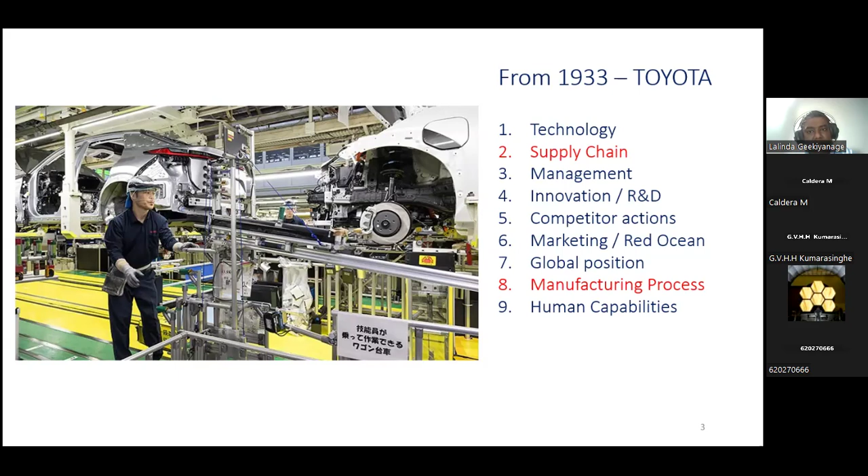The other thing is, when it comes to manufacturing process, you may have heard there are 8 wastages. Normally, in every organization, whether service industry, manufacturing, or production industry, we have to identify these 8 wastages. Initially it was 7, but now there's another one, and we practice 8 wastages in industry.

If you want to succeed in an industry, you have to eliminate some extended amount of this wastage. Otherwise, our production cost goes up, and our product cost goes up, and finally we will be eliminated from the industry. When you think about it broadly, you'll understand why Nokia failed in the manufacturing industry.

First one is transportation, because if you have over transportation, it will involve a lot of cost. The other one is inventory, because inventory means you are keeping your end product, or keeping your WIPs, work in progress, which can also be considered as inventories. Inventories means money that you block inside the factory. It doesn't have value, you can't sell it, but you always invest the money and block it inside the factory. Then you don't get any outcomes. Then your bank interest goes up, and all your financial stuff gets stuck.

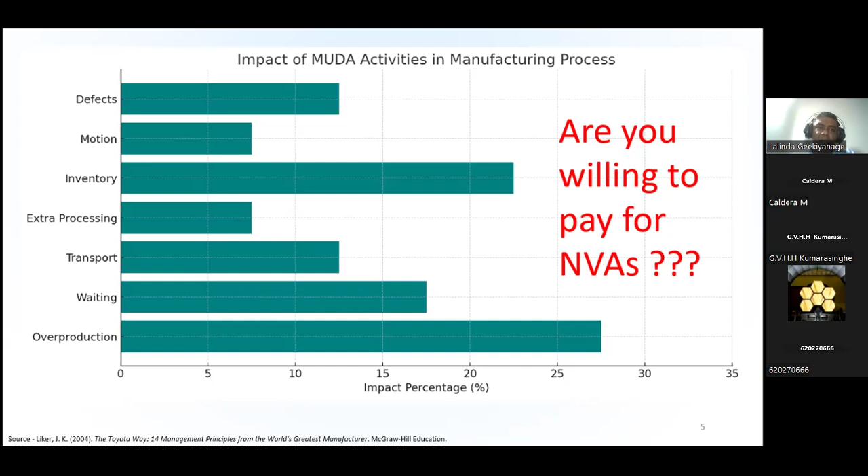In the next slide, I'll tell you how new technology is involved in minimizing these wastages in the industry. We have a small video, a 2 or 3 minute video - we'll listen to this. If you have anything, just let me know.

Excuse me, sir - I think we can't hear you. Sorry, we can't hear the video sound. There was an issue then, seems we can't hear. No, basically the explanation is coming, I don't know how it is. Hello? Yes, hello, we can hear you. Okay, sorry doctor, I think the voice is not linked with that. Yeah, that's fine, that's fine.

Okay, then what I try to show you in this video is basically the lean concept, because the lean concept...

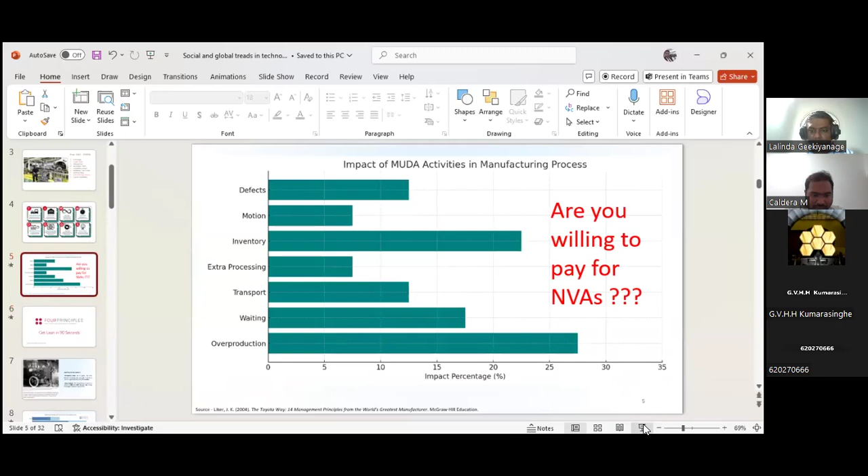Sorry for this one, because I thought the sound was coming through. Anyway, we were stopped at this point.

As I informed you, there are eight wastages in the industry. As a solution, Japanese people brought down this lean concept. There was a concept called Lean and Lean Six Sigma. Basically, lean is about identifying this wastage and giving some solution to eliminate those things. That was a kind of traditional approach.

Normally you see there are so many courses: Lean Six Sigma black belt, green belt, yellow belt, white belt, like that. Whatever it is, this lean concept came because of this wastage, because purely the lean concept came to eliminate wastage by understanding the process, understanding the wastage, and quantifying this wastage through information and data.

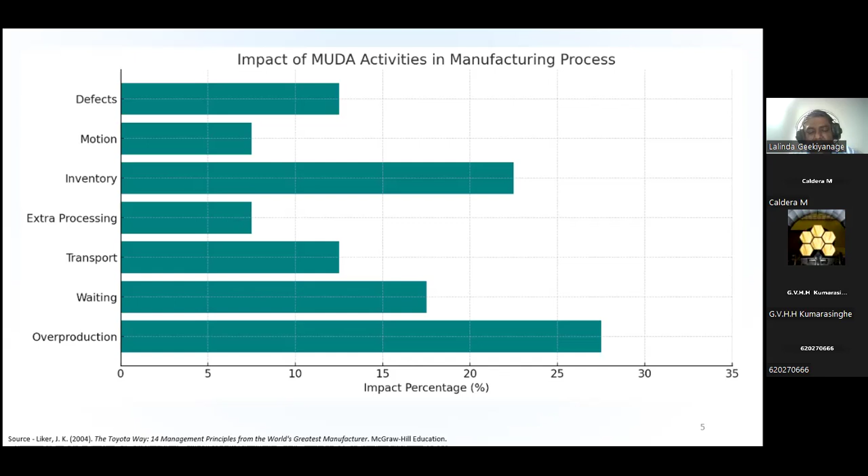So basically, even my organization also practices this lean concept - they focus on one particular wastage and don't invest too much money, because with the lean concept we are not investing too much money, but we try to eliminate those defects or wastages by changing the process slowly, not overnight. Some processes are not changed overnight, but time to time they understand, investigate, and change people's mindset - then only do the changes.

Okay, I think you may have heard about this story as well, because I'm linking this with another video, but it's not playing now, so no way, we don't want to waste time. I'll directly come to here.

I think when discussing this wastage, we may come across that outcome, like normally when it comes to every production industry... sorry, okay, there also one student is sharing how to do it. But anyway, thank you very much for this feedback. Anyway, we'll go through this way.

When it comes to every manufacturing organization, the first question asked by the top management is, what is your production rate? Normally we call it takt time, meaning how much product is coming out in 1 minute or 1 second.

The Ford T model is the world-recognized model of manufacturing, and they took 93 minutes to produce one car in a day. That means every 93 minutes a vehicle is coming from the factory. Their production outcome was 1,000 to 1,500 cars per day. I'm discussing 100 years back - just imagine, 100 years back, manufacturing one car took 93 minutes. But the only drawback was, as Henry Ford famously said, whatsoever I can provide is only the black car.

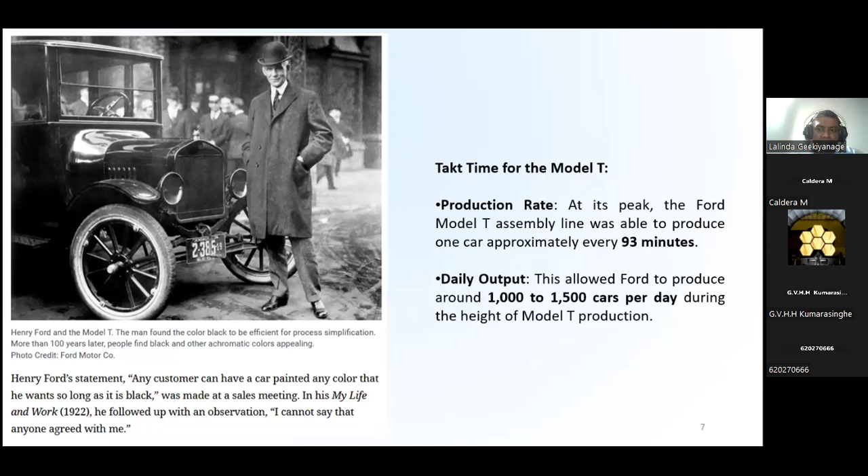Okay, now think about today's context. This is the takt time of today's context - meaning within a given time period, how many vehicles come out of the factory. Just see, Toyota took a maximum of 90 seconds for manufacturing one vehicle.

Volkswagen, 120 seconds. Ford, 120 seconds. GM, 150. Honda, 120. BMW, 180. Tesla, 90 seconds. I'm talking about today's context - only 90 seconds. Still, Toyota is at the top level because at minimum, within 60 seconds, they were sending out a vehicle. Just imagine how quick their production process is.

This is the development in the last 100 years. This is wastage elimination in industries. This is the beauty of the supply chain. This is the beauty of research and development, innovation, lean concepts - everything linked together. If you want to understand the manufacturing process quickly and more efficiently, you have to look at car manufacturers rather than others, because other companies don't give much information. But when you take the car manufacturing industry, you can understand the evolution and development in technology. This is true, because I can prove it myself.

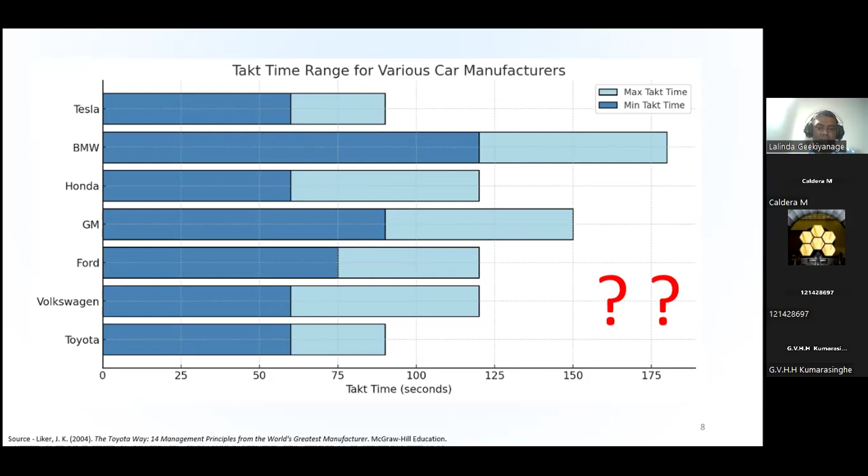Then there were a few more questions coming. Why has this technology had to be developed from 100 years ago to today?

Basically, in Henry Ford's time, if you had money, you could only buy a black T model car. When you went on the road, all the vehicles were black with the T model. You may be a billionaire, but you had to drive the same vehicle. But today, you like to customize. Even with a mobile phone, if you're buying the same Samsung phone, you at least like to buy a different colored pouch, because you need to personalize yourself. That is the main reason this industry has developed.

Basically, personalization means the consumer expects a product or service tailored to him or to that group. That's why different products come with different backgrounds. For example, Rolls Royce takes 13 or 14 days to produce one vehicle, or 6 months for a limited edition, because that is a personal product that has to be tailored.

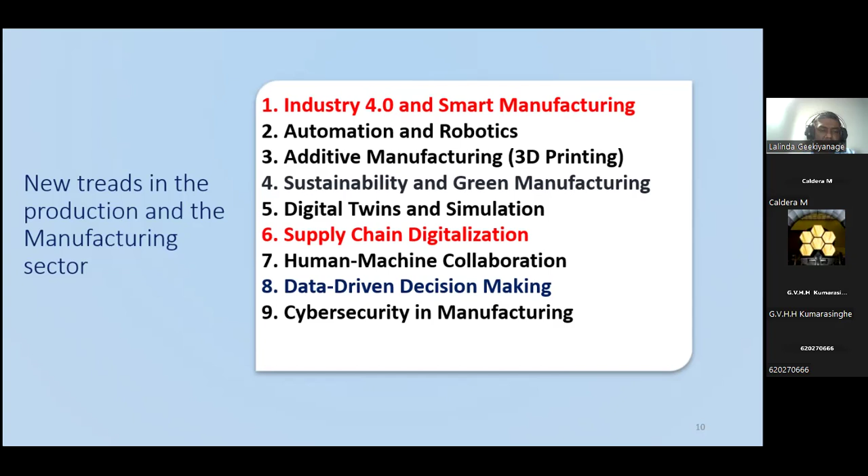Okay, let me give you a small understanding of this industrial revolution. In the 1800s, Industry 1.0 began with mechanical power and water steam power.

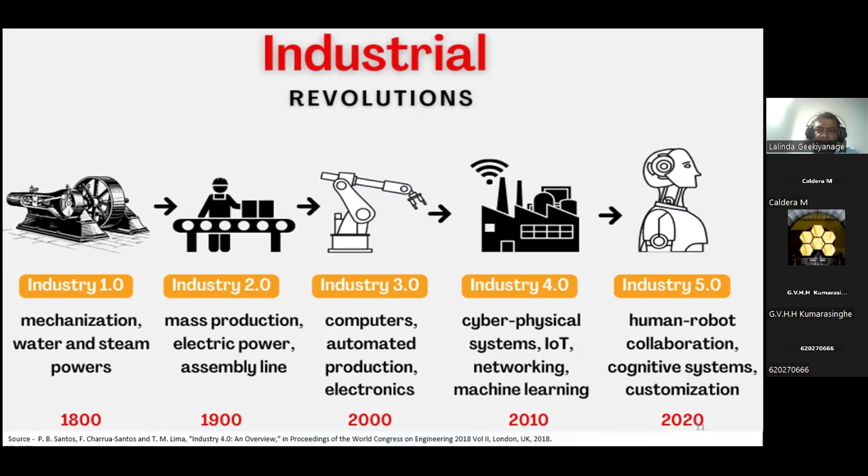Normally, most of you are computer students, so you can understand how it works. We are thinking and giving the data to the cyber system. They process it and put it into the physical system, and the physical system works based on the demand that we put there. But the thing I want to highlight is that the physical system and the cyber system work based on the command of the human. That is the combination and the link between these systems.

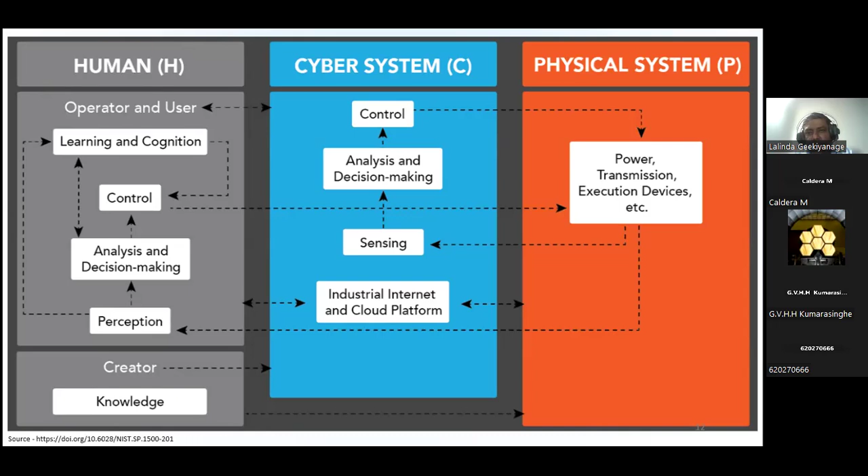Okay. This is also a video, I think you can't hear that video, so I'm not going to play that. But I'll share with you this, there was a smaller one. One second. Sure, I'll share with you the video links, everything. One second.

Can you please tell, what is Industry 4.0? You can hear the video now? Yeah, we can hear, okay.

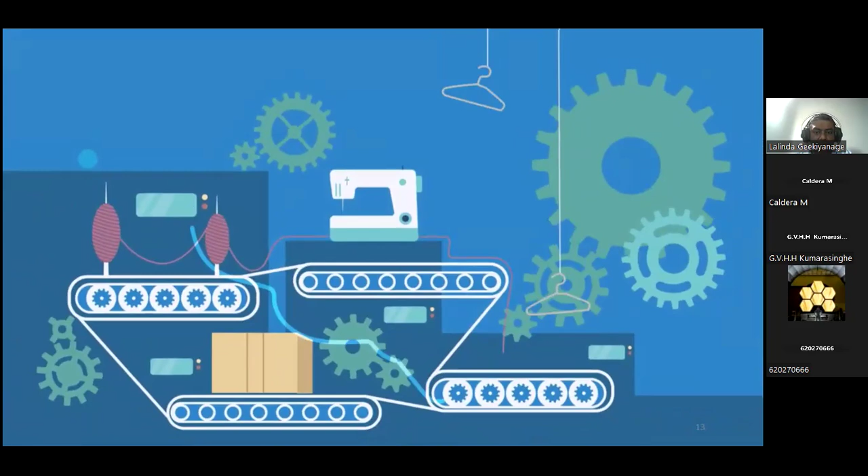What is Industry 4.0 and what does it mean for you? Technology is driving change across all areas of society. Not only do we increasingly use it and even rely on it in our personal lives, we also find our workplaces digitally evolving, with more and more processes now being undertaken using technology. This change is known as the Fourth Industrial Revolution, or Industry 4.0. Industry 4.0 will see many tasks that were once performed by us now being automated. With the collection and analysis of real-time data, artificial intelligence, and the ability for all components of a production line to talk to each other, production can be really efficient and personalized according to customer needs.

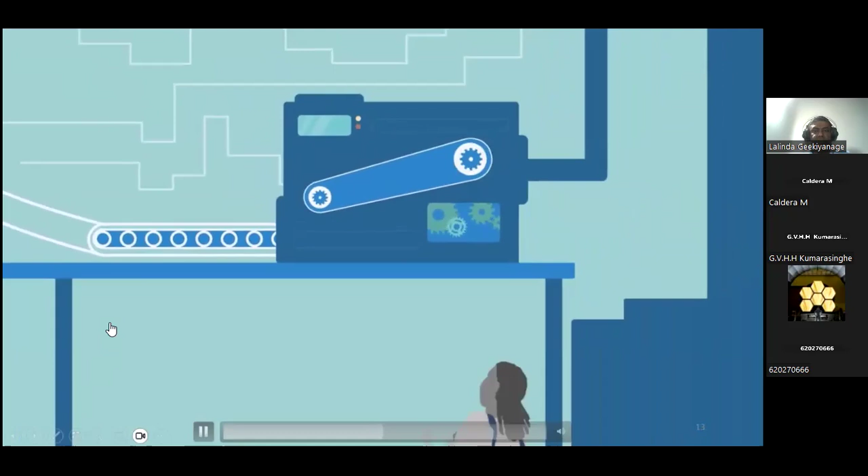But what does this mean for us? With increased automation, our time will be freed up for concentrating on more complex tasks. We'll need a workforce who are capable of building, programming, and developing these technologies, but also making sure we are applying them to our lives in an ethical way. There are core skills that we can offer that technology cannot replace. The human touch is going to be incredibly important, ensuring effective communication, problem solving, and supporting change management in this digital environment. There will also be a greater need for joint working across disciplines, creating new innovations. The future job market will be looking for graduates with an open mind to explore the unknown future possibilities. We will all need to develop our skills in order to embrace and adapt to this ever-changing environment. What will you do to make sure you are ready and have the right skills to thrive in the Fourth Industrial Revolution?

That is the question they were asking. Because when it comes to Industry 4.0, even AI, people have fear that they will lose their job. But my view is we don't want to lose, and we don't want to fear. The only thing we need is to be ready and understand what we're discussing. Because the same fear came when electricity was found. At that time people thought they would be replaced by electricity. But what happened? Electricity generated more jobs than before. We have to understand this.

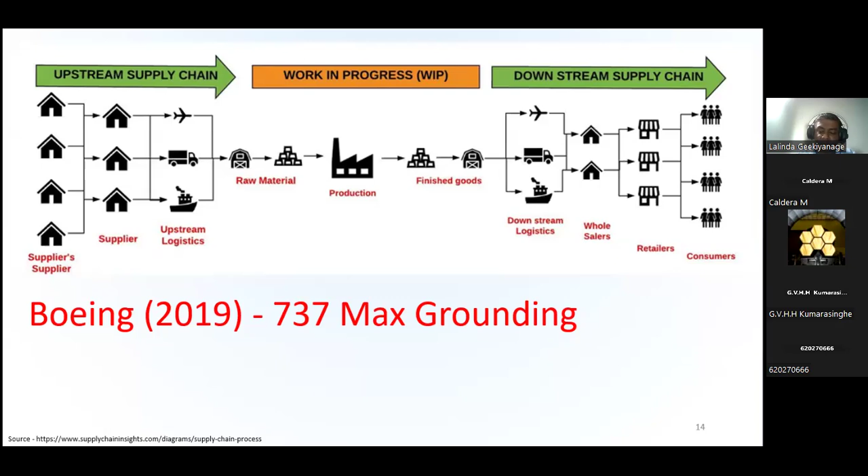They had to ground more than 100 or 200 Boeing aircraft until they found out the component, because they have that many suppliers in their upstream. They identified it, and to my knowledge it took more than 3 or 4 months to understand the supplier and stop the supplying process until they rectified the issue. This shows how complex the supply chain process can be if you don't have proper systems and digitalization. This is one good example of the complexity of the supply chain.

Another example is the semiconductor shortage, because that issue was not from the manufacturing process but from upstream, a supply issue. The whole world got stuck. Even today we still have the same issue.

You know about the Ukraine-Russia war, the Palestine-Israel war, and the China-Taiwan issue. Because of that, so much of the supply chain was disrupted. Even today, I read on LinkedIn that due to the Bangladesh issue, a lot of garment industries and garment buyers like Nike, the top players, are stuck because they give so many orders to Bangladesh. Today they have an issue - they don't have product to sell, because their supply chain got stuck due to internal conflicts. This is the issue when you have a global context and global supply chain process, because everything has to be online or in line to have a smooth production process.

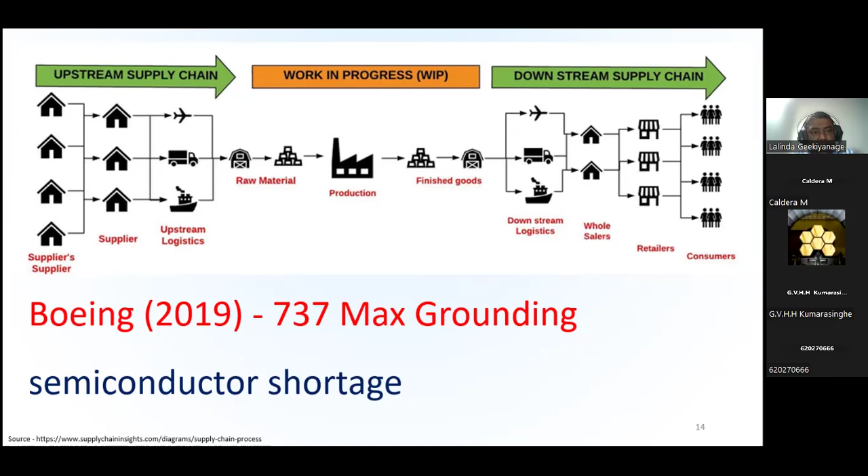Okay, I have a small video, not exactly, because everyone is requesting this process. One second, I'll try to show that.

You can see the screen now. Hello. You can see the screen now. Yes, sir, okay, thank you. Okay, this is the...

Basically, this is the concept of Industry 4.0. I have access to my previous organization, but it comes with a different VPN. When I log into that VPN, I can't log into this one. That's why I'm trying to show you a kind of animated version. We have the same system in my organization, a similar type of thing. This is the concept of Industry 4.0, linked with the physical system and the cyber system.

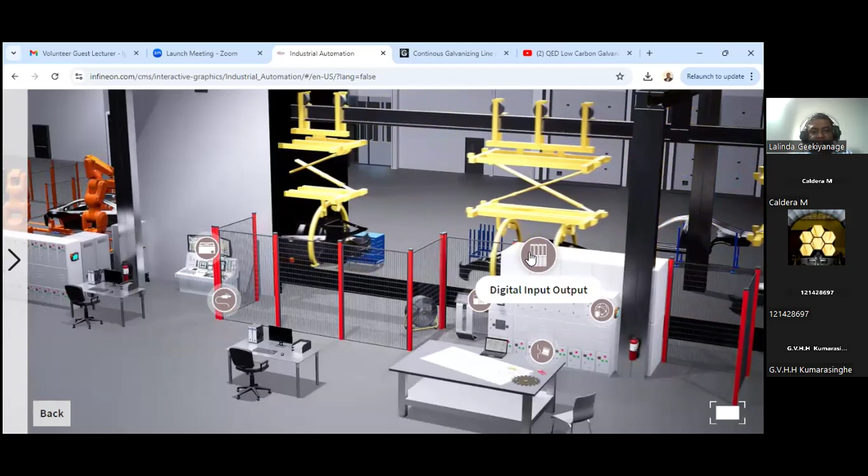One second. Okay, you can see this is the same type of thing in my organization. We have one control desk. In the control desk, you have an industrial PC, wireless communications, and power connections - everything is there. That means you can understand and control even virtually from your workplace without people present, because even if people are there, if you have a superior authority, you can override whatever instruction they have given. This is the same thing that happens in my organization.

Okay, if you want to go to the field level, you can go to the field level. I believe you can see these pictures, no? Okay, that's the same, like this automobile factory, but the same type of industrial features are there. You can see machine vision. I'm not going to that deeper level, because when you go deeper, this gets stuck.

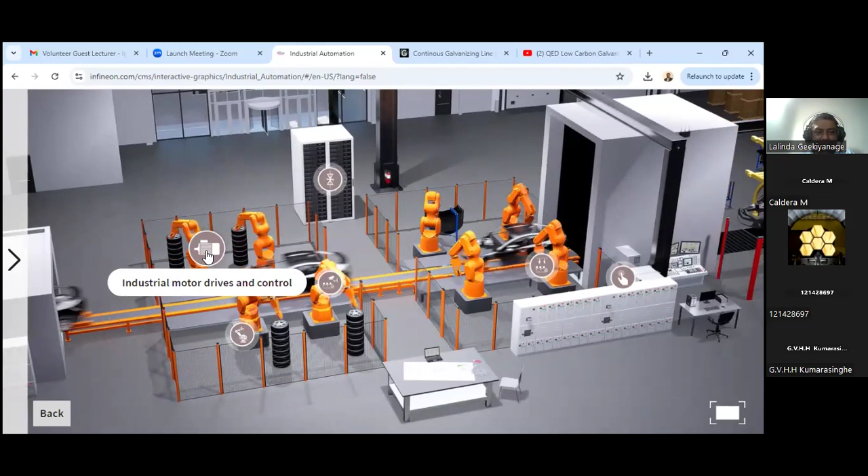Even industrial motors and devices - their power consumption, connections, and efficiencies - everything is recorded in real time and online. That means if there are any defects, just imagine the heat level of this motor is increasing, then you can switch off this motor and do on-time repairs to minimize downtime. This is how new machinery and new production processes are set up, because you want to minimize your downtime.

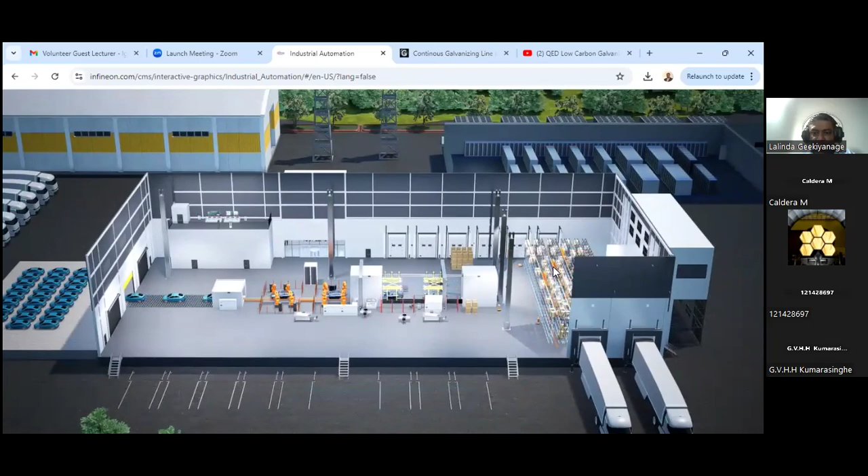You can go to the warehouse systems. You can see we don't have this much of a complex one, but anyway, we know how much WIP storage there is, how we store these items, where those items are stored - everything is listed in the system, because you can understand every moment and where every item was stored at that particular location.

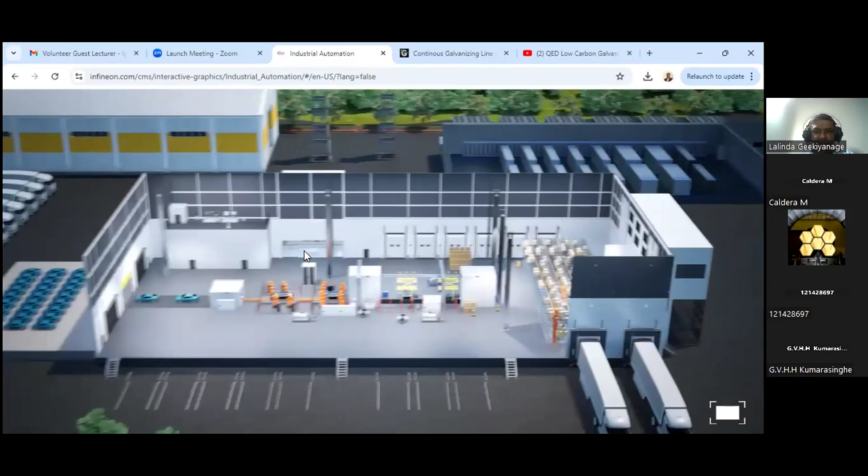And yes, when it comes to this one, everything is fine - supervisor level.

Yes, there was a central control system. We also have one big LCD TV monitoring how the process is going, how much product is coming out from the line, how many people are engaging with the work, and how many defects there are. Everything is recorded at that place. I think you can understand how this cyber physical system, or smart manufacturing process, is working.

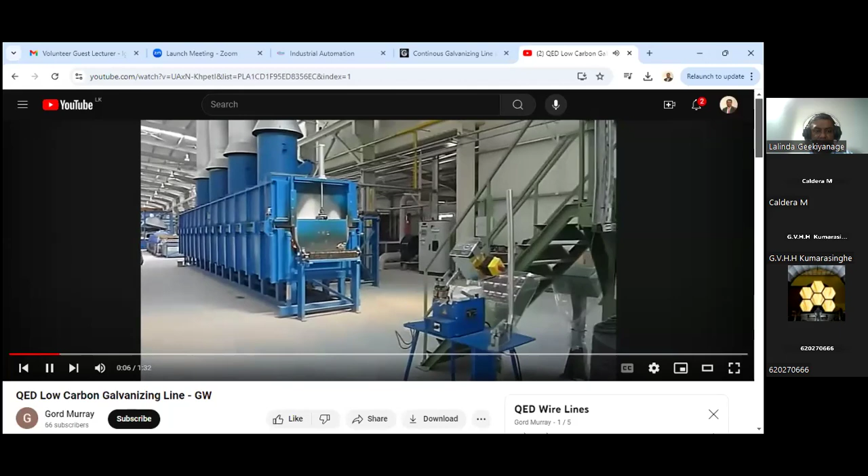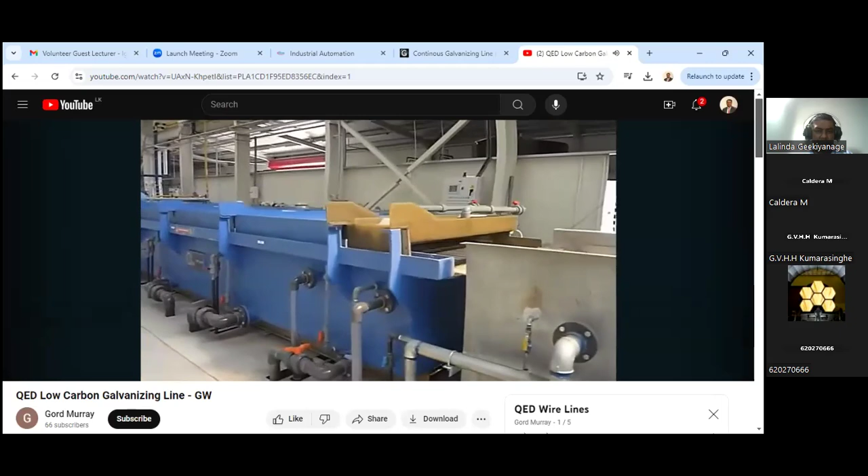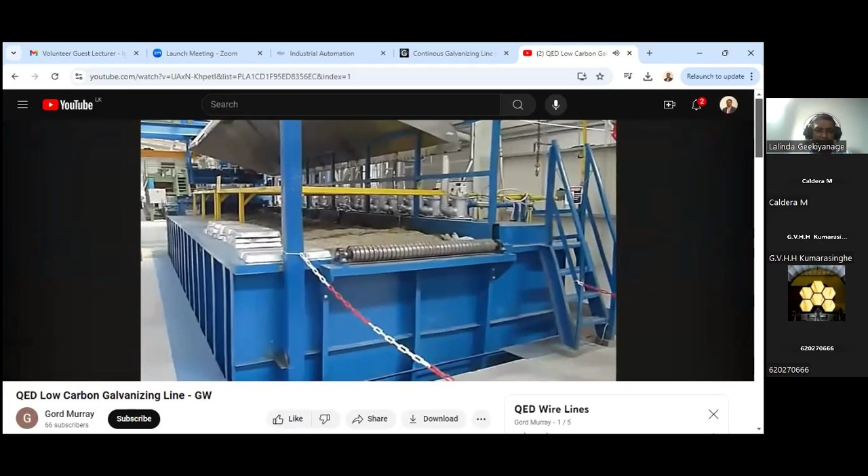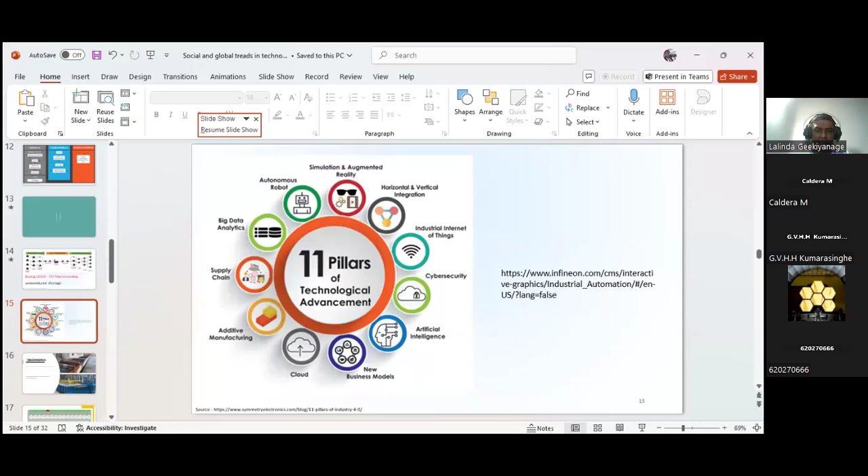Okay, basically that is the new plant that we were having in Sri Lanka, because initially we had the old plant, simply a traditional plant. It's very challenging to work with that traditional plant, because we don't have a proper communication mechanism, meaning we don't know, it's basically a mechanical plant.

But now we have the mechanical plus electrical and electronic plant. Normally, every data we were communicating through an HMI, human machine interface. I'll show you a few outcomes. With this HMI, physically we can feed the data to the system and control the process. Same as with the Industry 4.0 concept, physically or through the internet, we can control the system. We only need a minimum amount of technical people to run that process.

I'll give you some feed data. Initially, when running this total mechanical system, we had 35 members in one shift, altogether 70 people running it. But with this new system, we have only 7 people per shift. From 35 to 7, we have reduced, because everything is controlled by the systems and we give instructions through the computers.

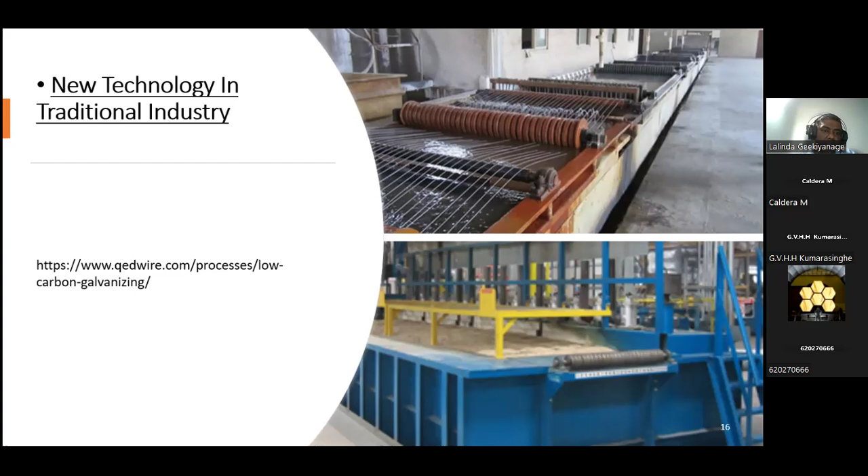These are the kind of interfaces that we were having. This is basically a production control panel. We have 30 lines.

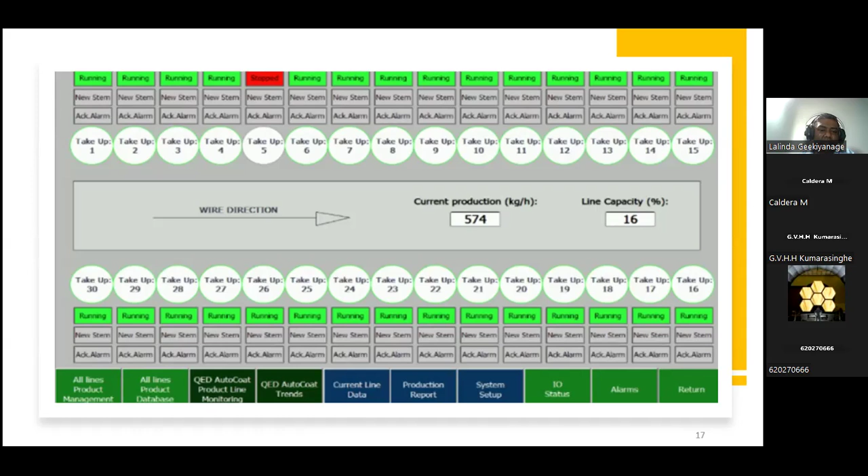We were monitoring every line every time. That means even at this time I can monitor how many lines are running, the speed, how much production. Current production is 574 kilograms per hour. Line capacity is 16%, so normally we had to increase that to another level. Everything we can monitor, and at this moment even my CEO is joining and monitoring this, understanding how the line is running. That type of easiness is there with this new technology.

Initially, we didn't have that type of control at all. It's running, and at the end of the month we know how much gas we have burned, that's all. But now, with the production process, we can control the temperature, we can control the gas flow rate and everything. We have control and we have freedom. But the good thing is that even when you're controlling, the system shows whether we were at risk or we were in the right place. That also is given by the system.

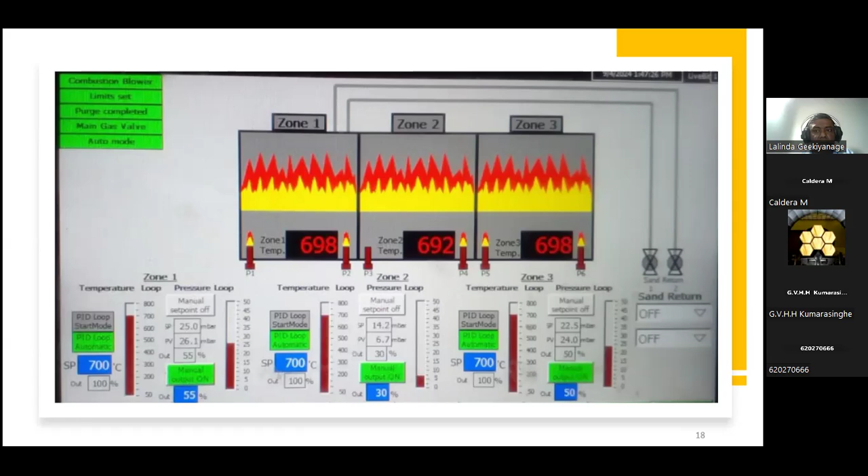This is also the same type of burning mechanism. We have set temperature at 700, and it always runs below that. Then we can save some energy, we can save some raw materials, we can save some maintenance cost as well as running time and everything from the system. This is basically the HMI, human machine interface.

Second, sir, we have many benefits with technology development, but what about the jobs of people who worked with the old technology, when any technology goes up? I'll give you an answer from this question, because his basic question is when you are developing a technology, the people will lose their jobs. That's the main question he was asking.

Good question, but the only thing is that no, that will never happen. What we did was, when we were making our production systems more efficient, we have more options, like we can go upstream or downstream in the production process. What we did was we didn't lay off the existing people. We started up a new factory for producing the end product, some other production plant, and then we put that people into that plant. There are companies who are doing otherwise, but basically when you are increasing the efficiencies of the process, we can use this extra people for different processes.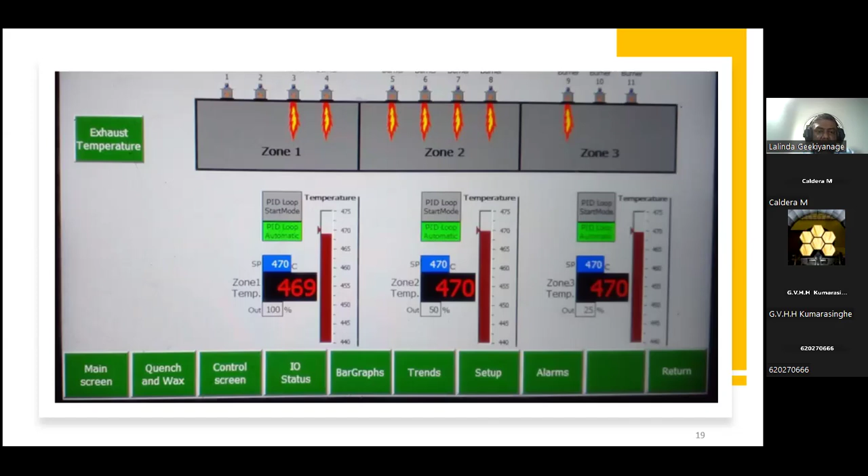Even with this enhancement of our new technology, we have developed some people for feeding the data, analyzing the data, because we also need to prove to ourselves that the computer is giving the right data. From that time we had to double check these things. Yes, of course there may be some argument, but most companies are not doing it like that. Once they achieve or enhance the process, they will put the extra people into another factory or another process.

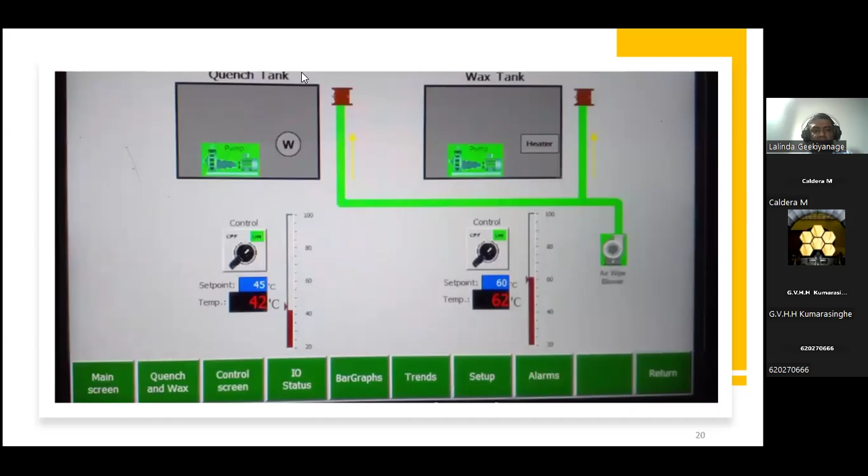This is also the same, like this pumping system, water pumping system. We can understand the pumping capacity, the temperatures, everything, and control the process.

Okay, then when it comes to the supply chain, because this is the second part, supply chain is also, as I told you, a crucial part when it comes to the production process. Now supply chain is digitalized, as I told you. Initially it was line-wise, but now it's a matrix process. Everyone can control, and every person can access every section of the process. Like the supplier can see the production process, the supplier can see the customer's demand.

Based on that, he can produce the product. Big data is becoming a more valuable asset in the organization, and big data analysis is more crucial than before, because with data only can we do accurate forecasting.

When it comes to the FMCG industry, one of my friends is working at Unilever, and I had a chat with him. They have field sales executives or field sales officers who go to small boutiques in rural villages and rural areas, asking shop owners how much Sunlight soap they have. If he says 5, and how much he requires, he says 10, then at that time they feed 10 units to that particular location. All this data goes to a central location and feeds into the manufacturing factory. Based on all that data and forecasting, their manufacturing process starts. Only when it reaches a certain level does the production process start; otherwise, they don't start until they get that demand.

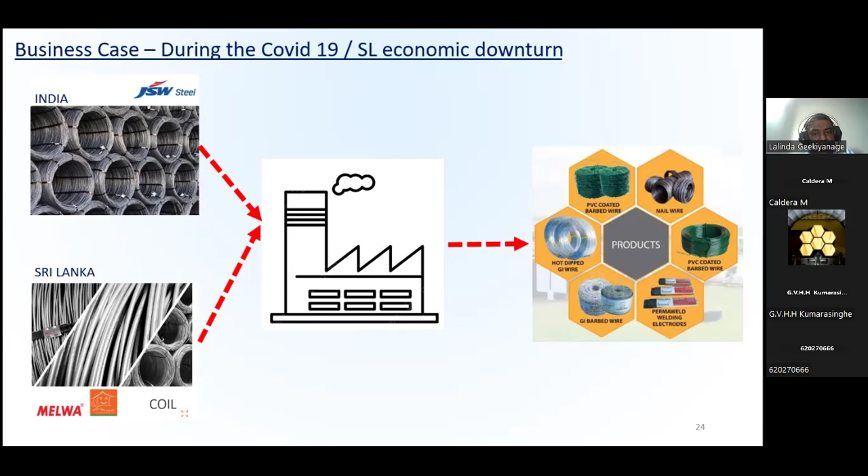Okay, this is the new trend when it comes to supply chain. One is reverse logistics. Basically, reverse logistics means when you provide a product to customers, the customer demands some recycling activities or a kind of revert back of the product. As I told you, with solid tires, they were saying once you have the final product or the damaged product, you have to buy back those products simply for recycling. Even in the electronic industry, the same thing - once you have electronic wastage, the supplier has an agreement to buy back those things, to protect the environment and give some social responsibility to the environment.

And the other one is green supply chain. This is also a new thing, because most of the time packaging, transportation, distribution, plus storage are done amalgamated with the environment, like whatever packaging we use is environment friendly. Most of this transportation is done with bulky vehicles or, in Europe, they say they use electric vehicles or hydrogen vehicles. It's a bit complicated to explain, but still people believe we need to go with green supply chain.

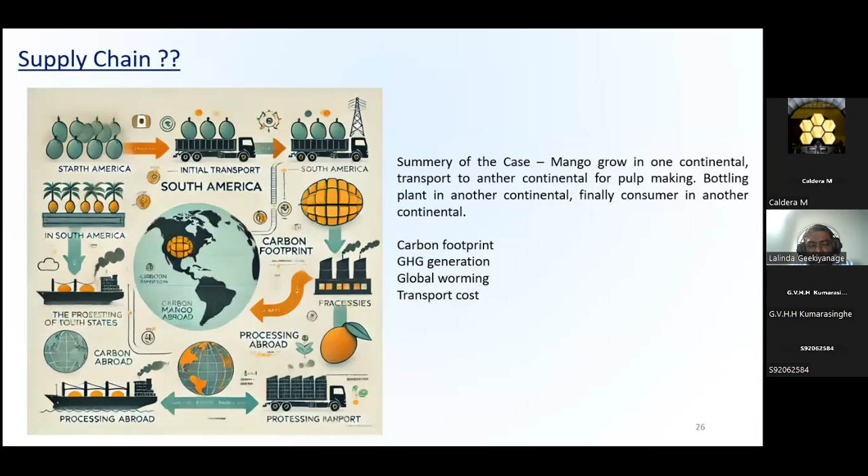It's open to argue from your side also. I'm also finding information on this question, and once I have time I'll share my findings with you. This is open for you to discuss at your level also. Even you can see many things happening this way - producing in one location, moving to another location, then again moving to another location. But end of the day, my argument is it's not a supply chain. It's something else - we have to explore that process.

When it comes to social trends, I think we've discussed more on technological trends, but there are a few social trends in today's world. One is basically digital connections. Today we do the same thing because virtual communication is now more reliable than face-to-face discussion, because now you have time - at 8 o'clock we start the discussion. If we don't have this portal or platform, I don't think we could do this. This is also one trend that's globally emerged.

The other one is gig economy, which indicates flexible working and economic independence. When it comes to European countries, they are more focused on economic independence - they like to have small jobs, earn money, and have a mind-free kind of thing. That's why a lot of Uber-kind of things and online selling happen in the economy - people like to have flexible working hours, earn some money, and keep their mind free for the rest of the day. This gig economy is also a kind of new thing to the world.